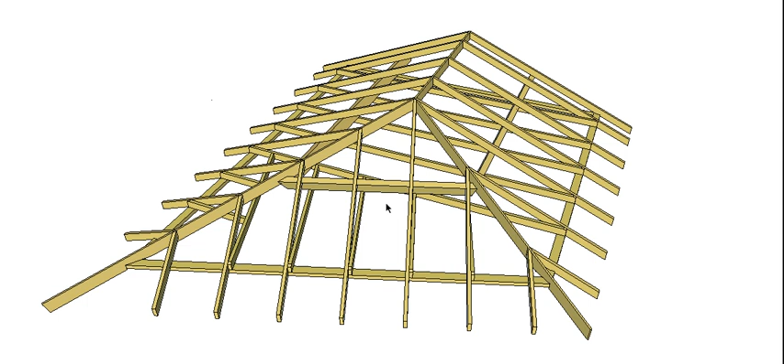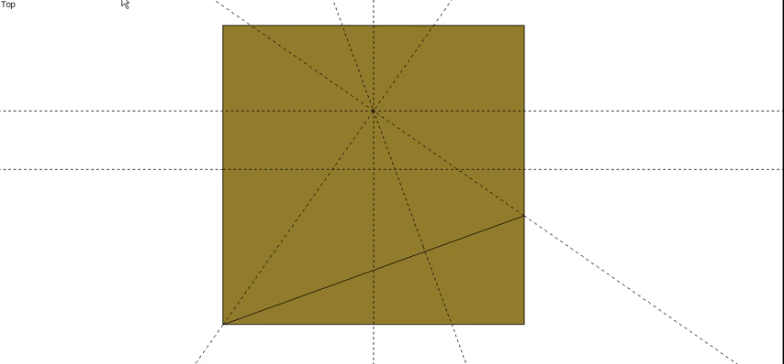So what you need to do is actually draw in, on whatever you can find on the floor, on a piece of flooring or whatever, I've got a bit of ply here, the actual intersection of the roof at full size. So just drawing in here the angle of the oblique end, whatever that angle happened to be, and drawing all my center lines, and I'm going to draw in all the members full size.

So I would actually draw in the actual thickness of my ridge, the actual thickness of my centering rafters, my hips, my crown end, and the two creepers for both of the hips, to draw them in full size. Then what you're able to do is measure what the difference is from what it would be if it was a square end, and you can physically measure how much extension that bevel gives it.

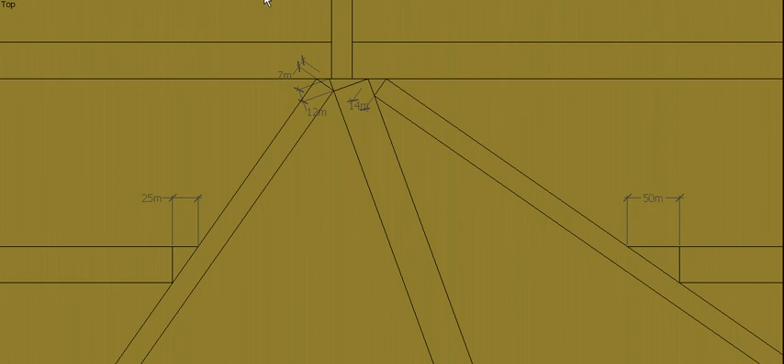So in this case it's 25mm, this side it's 50mm, we've got 14mm on here for the short hip, 7mm for the long hip, and a 12mm extension for our crown end. So once we know what they are, we can then go to our actual members, and this is the creeper

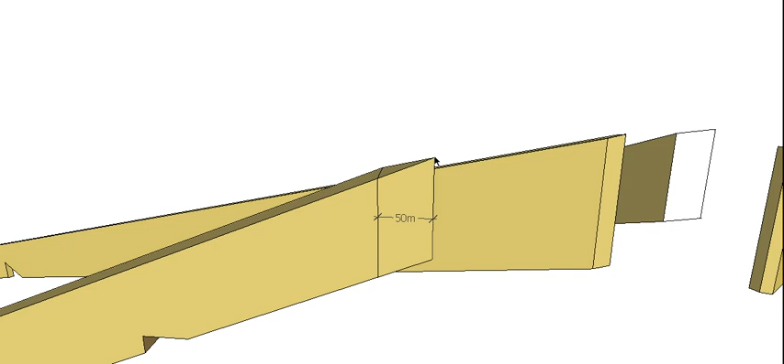for the short hip. So if we know our plumb line and we measure square off our plumb line, don't measure up the angle of the roof, measure square off our plumb line for our creeper, or plumb line for common rafter in this case, we can actually find where our creeper bevel should end. So that's just a quick way of establishing the creeper bevels.

And obviously if we go to the other members, with our hips, remember you have to use the plumb bevel hip and our little measurement. That'll give you the bevels of the hips.

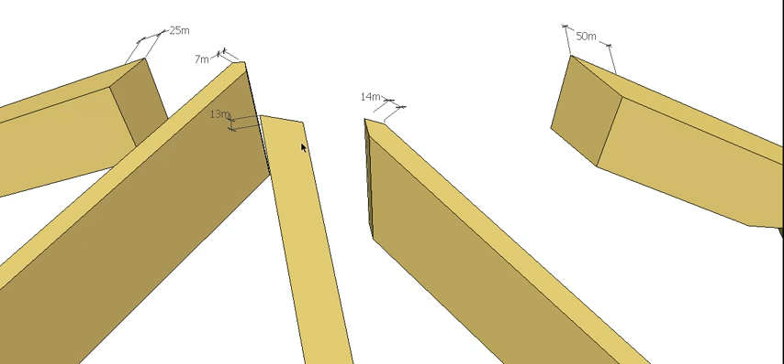So make sure on the long hip you use plumb bevel long hip, short hip you use plumb bevel short hip, and on all your rafters or your creepers you use the plumb bevel for the creeper rafter, and then make sure your extension is drawn square off the plumb line, and that should give you accurate edge bevels pretty quickly.